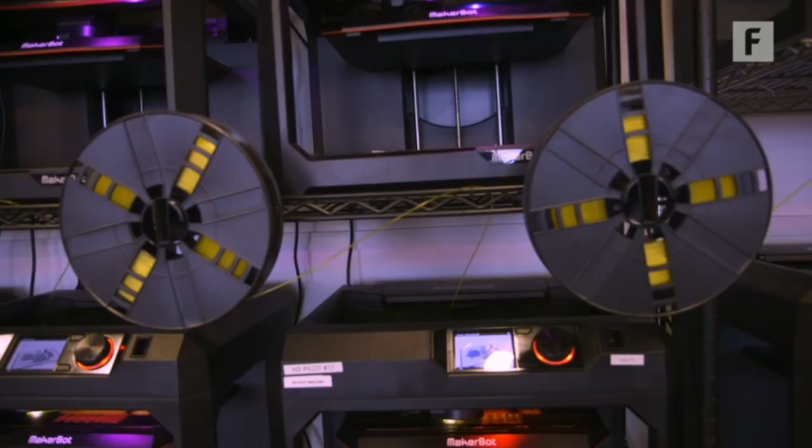Technology to extrude plastic in order to form a physical representation of a 3D model has been around since the mid to late 80s. In the early 90s there were probably less than 1,000 3D printers in the world. Now there's approaching hundreds of thousands, if not a million.

We are building the printers that are enabling the innovators of tomorrow.

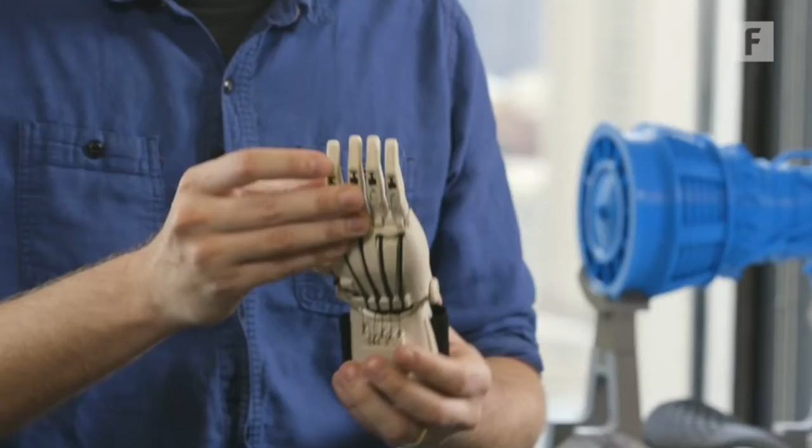Anything in my apartment, I first look at it and I'm like, can I print this? I'm really excited about that next plateau.

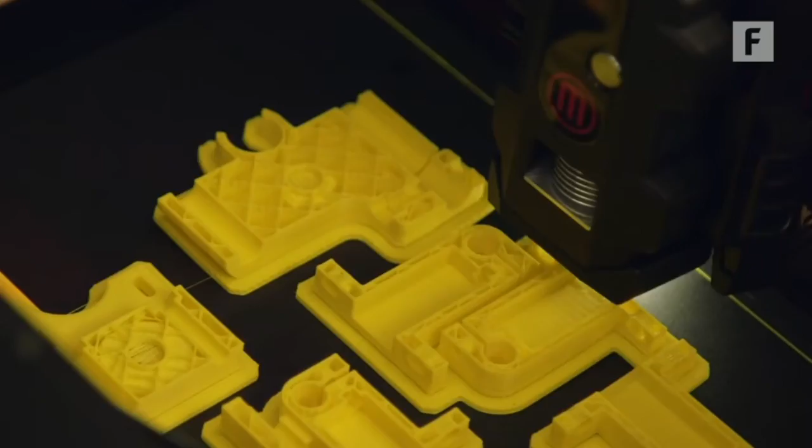MakerBot in 2008 was the first to condense and reduce the cost and simplify this crazy lab gear into a desktop tool. You could get a $1,000 machine, bring it home, put it together, and 3D print something, and that was the absolute bleeding edge of access, of sophistication at that scale.

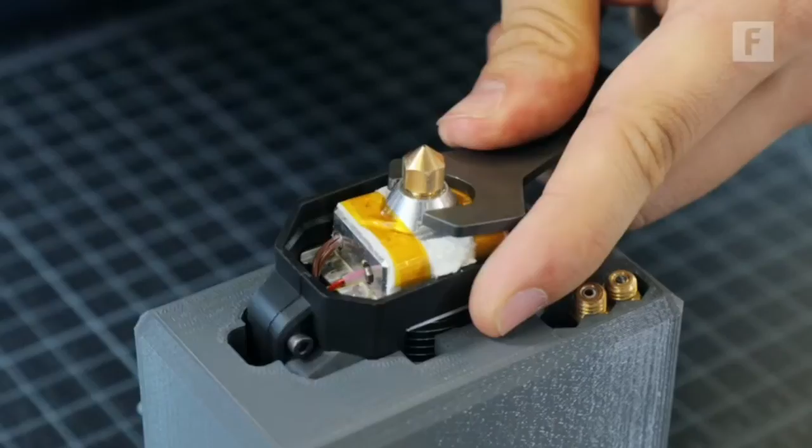We definitely started more in the hobbyist maker movement, and then as we matured as a company, we realized that a lot of the people who actually bought our printers were professional users as well as educators. That being said, though, a lot of those people were also makers.

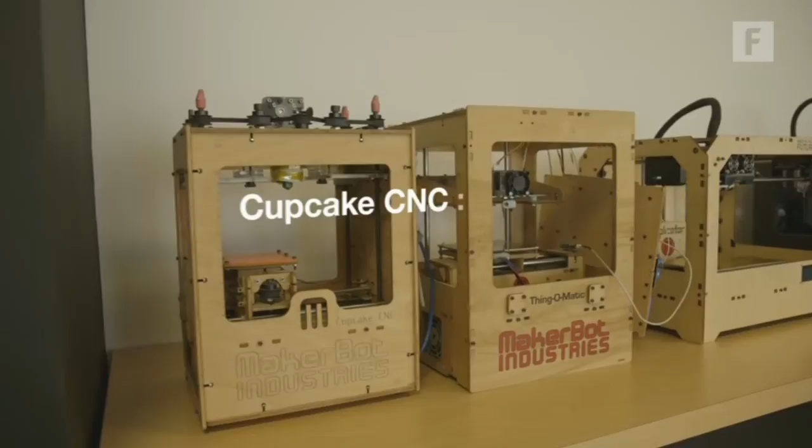Those machines that our parent company was selling were anywhere between $500,000 and $1 million. To get the Cupcake CNC for anywhere between $1,000 and $2,000 is a steal. That massive shrinking in cost is what opened up access in ways that we hadn't seen before.

The hardware has become a lot more polished and easy to use. Now there's a little sensor inside of it. They're a lot faster. They all have Wi-Fi, which is cool.

This is probably one of the most futuristic things I've done. I was on a plane and I had Wi-Fi, and I was like, oh, I want to print that thing for my Nintendo Switch. So I printed it from an airplane, and then I sent it to work, and I was watching it print out while I was flying across the ocean. I was like, this is pretty cool.

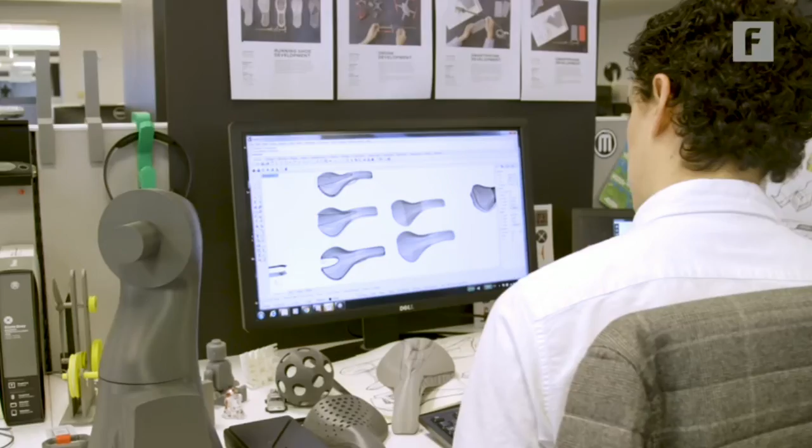People were talking about everybody being able to access a 3D printer, almost to the point that having it be as commonplace as a microwave. We missed on the microwave. However, it's becoming almost as commonplace as a chalkboard in schools.

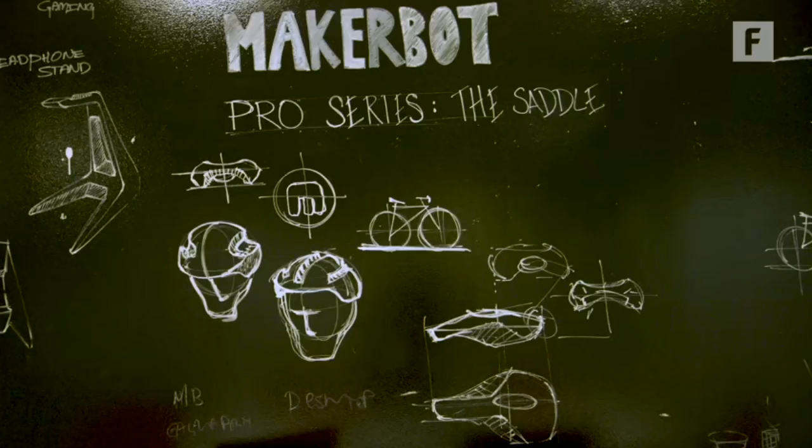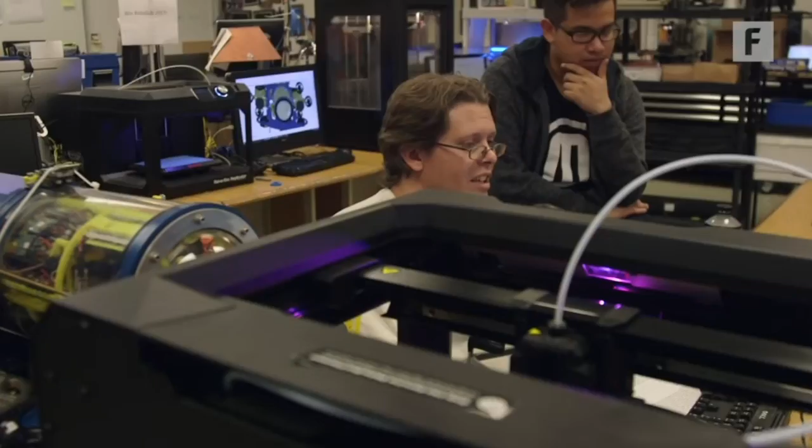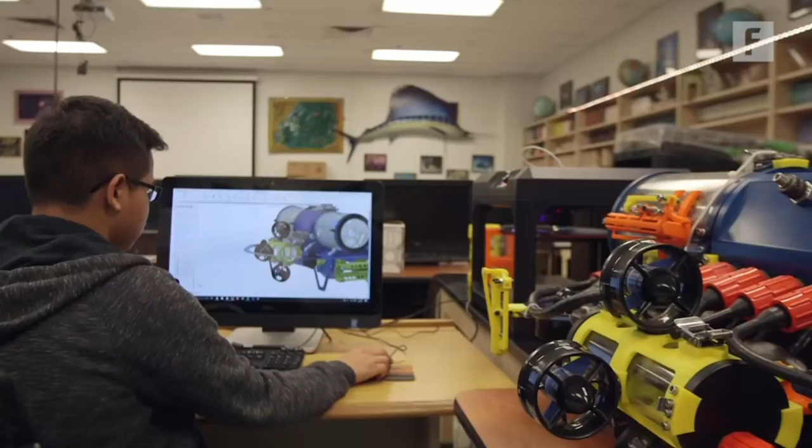I only had access to 3D printing in my college degrees. Here at MakerBot, we are enabling students to have access to those printers from the kindergarten years. It's just unbelievable. I've been working with printers for about 10 years, and imagine a kid that starts playing with a 3D printer from elementary school. Just thinking about what they could do, it's really humbling in a way.

They're in 7,000 schools, and then they're also in the Lockheed Martins of the world.

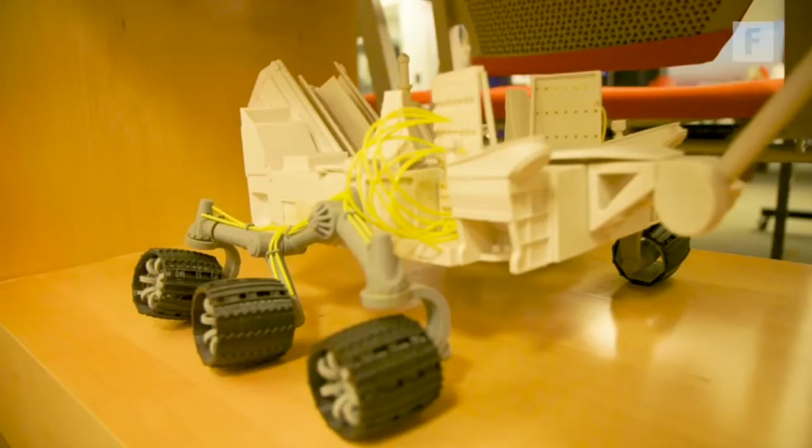Anyone who knows Minecraft basically knows how to 3D model, their brains are just wired that way. They can export models from Minecraft and print them right away. So it's super cool. It's sort of like Promethean technology that anyone can get what they want out of it.

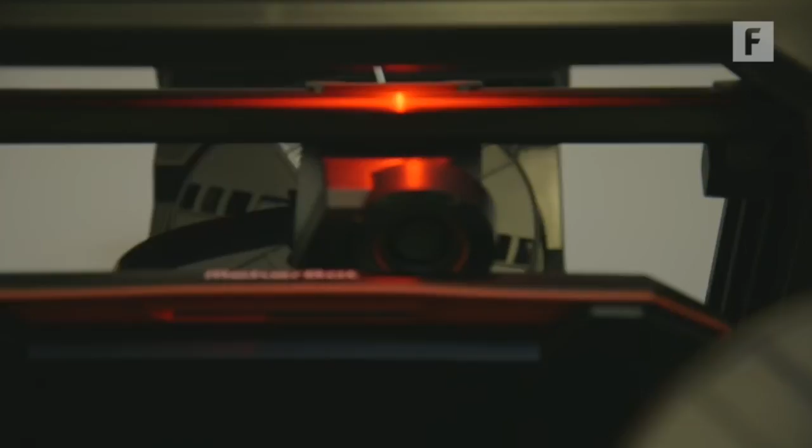What we're really excited about on the hardware side is the experimental extruder. Since these extruders have a magnet on them, anyone can make any tool head for it. Basically, it's hackable. The plans are online. You could print different material from anyone. We've seen tattoo printers hacked.

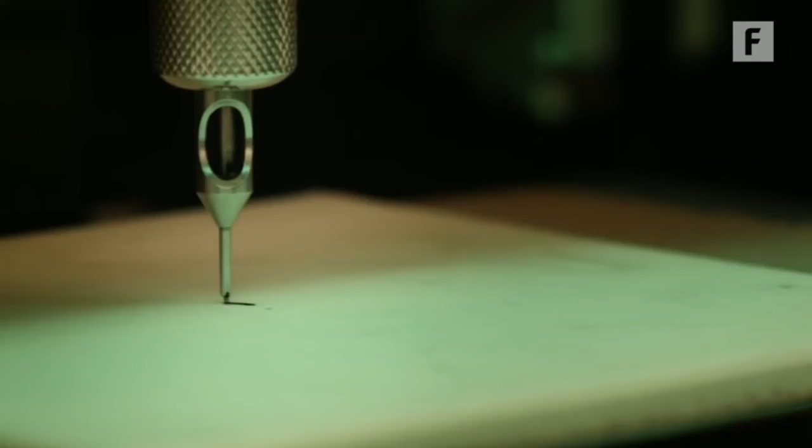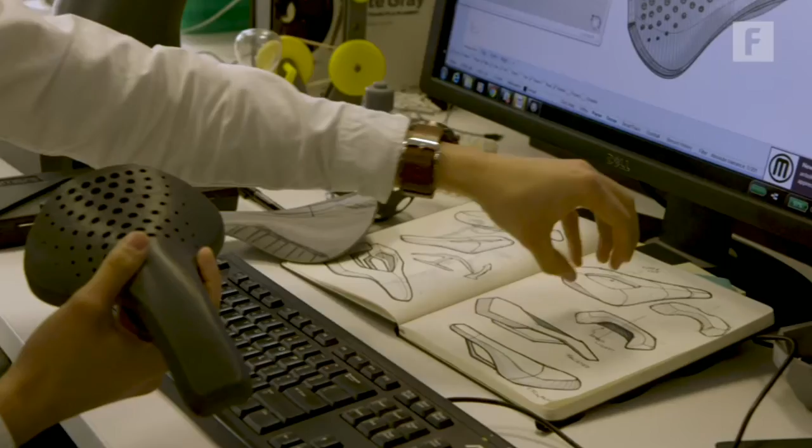We've seen bioprinters hacked. A lot of what our printers are used for in the medical field is pre-visualization. It's the same logic of what happens if I had an idea in my hands versus if I had an idea in a flat screen, in a 2D representation.

For example, this doctor was creating these tumors after being scanned. Printing the tumor before trying to extract it gives him such a better idea of what he's going to be facing once he's in there.

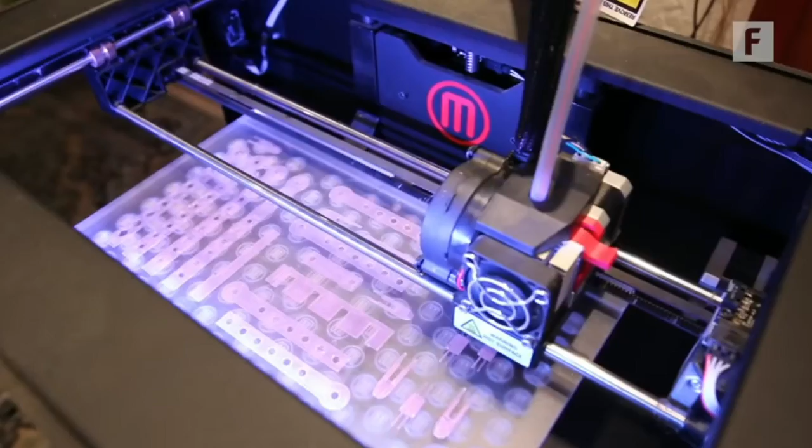This is one of our most successful prints. It's called the e-NABLE hand. It's a prosthetic hand for a kid.

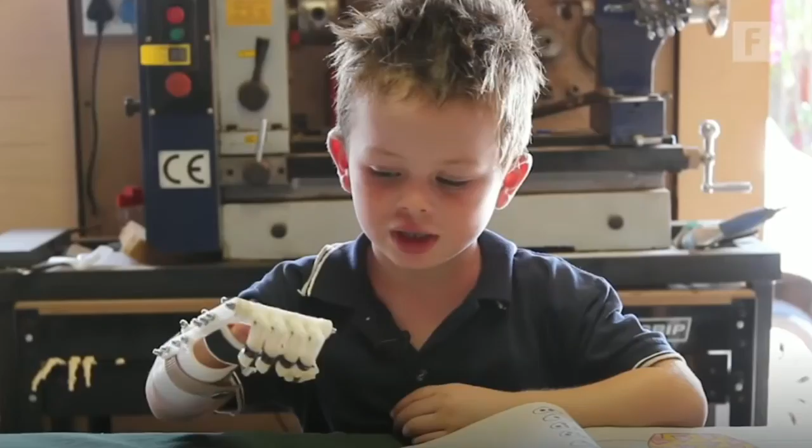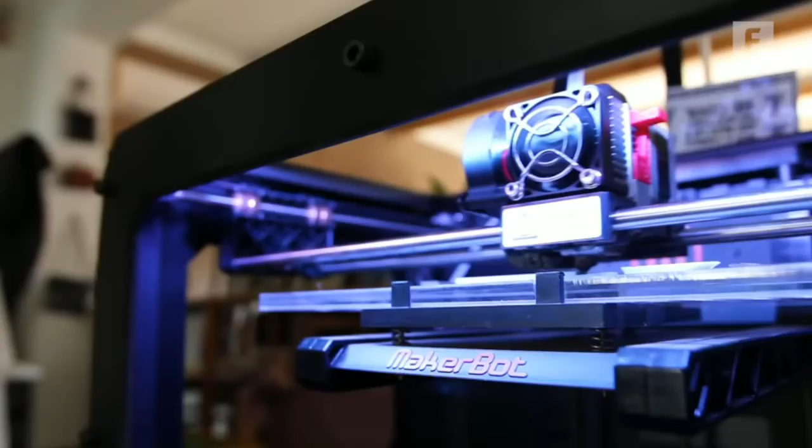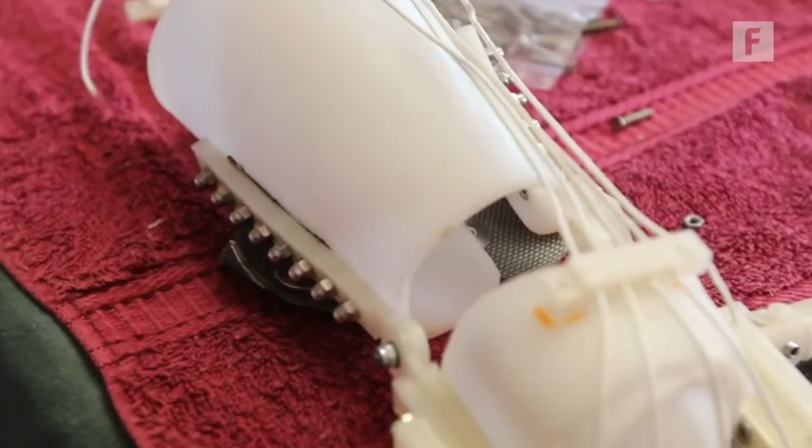Kids grow really fast. They need to have a replacement of these items fairly constantly because they are growing. By having a 3D printer execute on this, you can have that item be customized every single time at a cost-affordable price. If you wanted to create something like this in a traditional method like injection molding, you're talking about several tens of thousands of dollars worth of molds. If you 3D print it, it's probably not even $5 worth of material.

As you see the object in your hands and you're able to interact with it, you get so much more information than just by thinking about the problem, and ultimately better serve the kids that are going to be benefited.